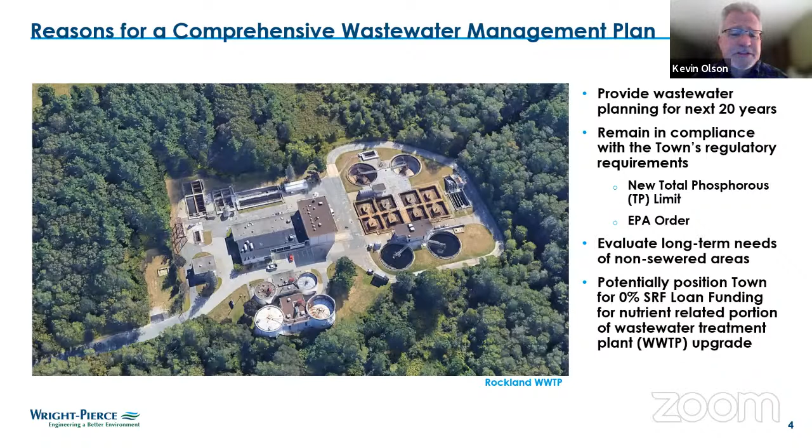Last bullet here, my last comment: completing a CWMP does potentially position the town of Rockland for 0% state revolving fund loans for the nutrient-related portion of any treatment plant upgrades. I just mentioned phosphorus; that certainly is the nutrient of focus. So there's a potential financial upside to completing the CWMP. With that, we'll hand it over to Adam.

All right, thanks, Kevin. As Kevin mentioned, I'm Adam Higgins. I'm the project engineer for the CWMP for Rockland. We finished phase one back around the same time the EPA order was being finalized, so back in late summer of 2022. We'll touch quickly on what went into that and how it relates to moving into phases 2 and 3. We recently completed phase 2 about a few weeks ago now, and we're currently working on phase 3.

So the CWMP, Comprehensive Wastewater Management Plan, we typically break up into three phases, where the first one is all about looking at the existing conditions for your wastewater system, the town as a whole, like population trends, metrics, town planning, zoning, etc. Existing conditions of your pipes in the ground for the sewer system, water demand in town, pump station existing conditions, and the wastewater treatment plant. Let's jump into that a little further.

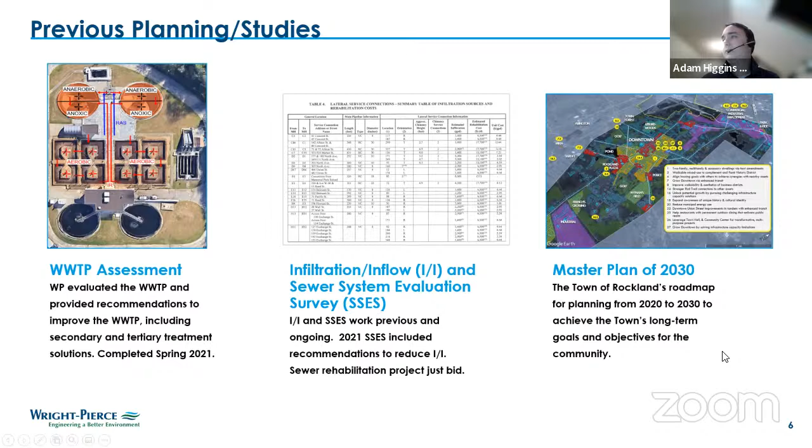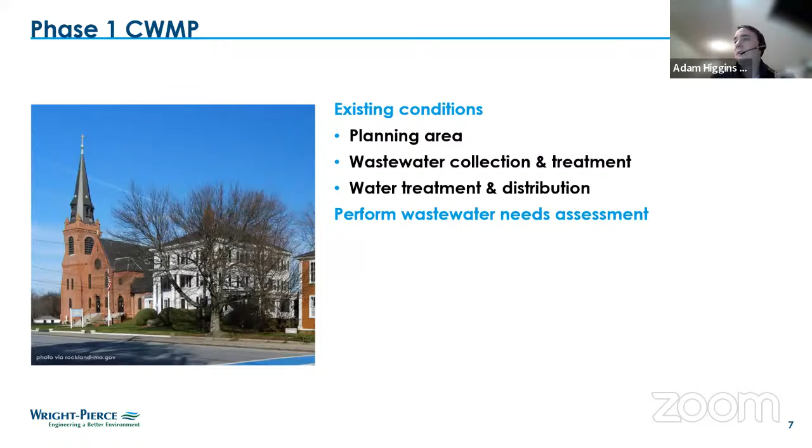And then we also take a look at Rockland as a whole. The town actually recently completed quite a few planning documents, the master plan, open space plan, and we did leverage those quite a bit for phase one. So again, phase one is all about establishing those existing conditions and identifying the potential problems in town, which will then move forward into phases 2 and 3. So we take a look at the entire town, collection system, treatment, water, and perform a wastewater needs assessment. Jump into that.

So as Kevin mentioned, Rockland is like 90 or 95% sewered, meaning most properties in town are served by the town sewer system. The remaining ones are serviced by a typical on-site subsurface wastewater disposal system, aka a septic system. And basically what phase one aims to do is take a look at those unsewered areas and see if septic systems really are the best option for the next 20 years in terms of providing adequate wastewater treatment.

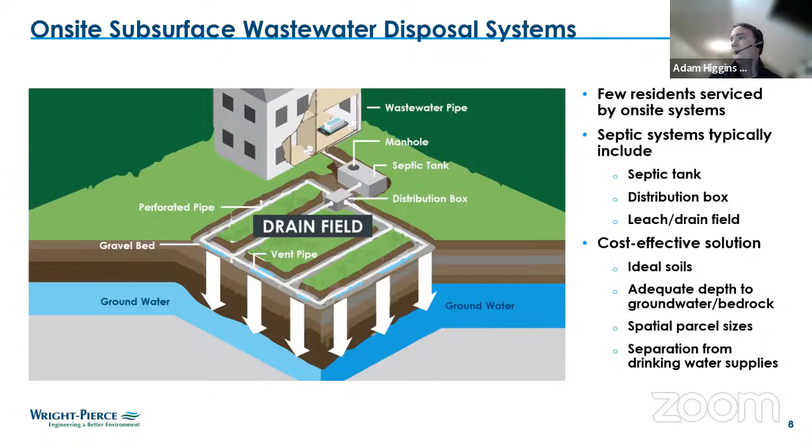So can someone confirm if you can see my cursor on the figure? Yes? Okay. Okay, great. That will help.

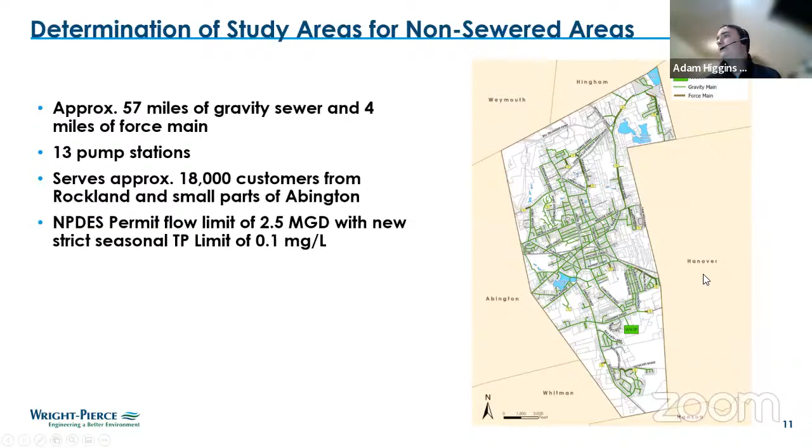As we mentioned before, the wastewater treatment plant was evaluated a couple of years ago, and we did leverage that report to establish the existing conditions. We updated it based on items that had changed since the report was finalized, and items that Veolia and the town have either updated or replaced, and also based on the data collected over the last 2 years. We updated what we call flows and loads, which I will get into.

But the main point I wanted to highlight here, because this is the largest looming upgrade project that the town and the sewer commission is going to face, that is basically going to be derived out of the CWMP, is the wastewater treatment plant upgrade. So, what is really driving this large upgrade?

And these specific types of equipment are called mechanical surface aerators. They're not the most flexible, but they were pretty popular back in the 70s and 80s. So we really wouldn't put these back in if we were upgrading a plant today. So just the type of equipment used at the plant is something that we would want to take a look at in any upgrade.

Adam, before you go, and just for background information to any of the residents on, the sewer plant went online, I believe, in 1962. That's when it was originally designed. It has had no major upgrades since that point. Right. Kevin, I would say 90% of that equipment is 1962. Yeah, I would agree. And so that's all of that concrete. And we did have structural engineers look at the concrete basin. So I'm sorry, Adam, keep going.

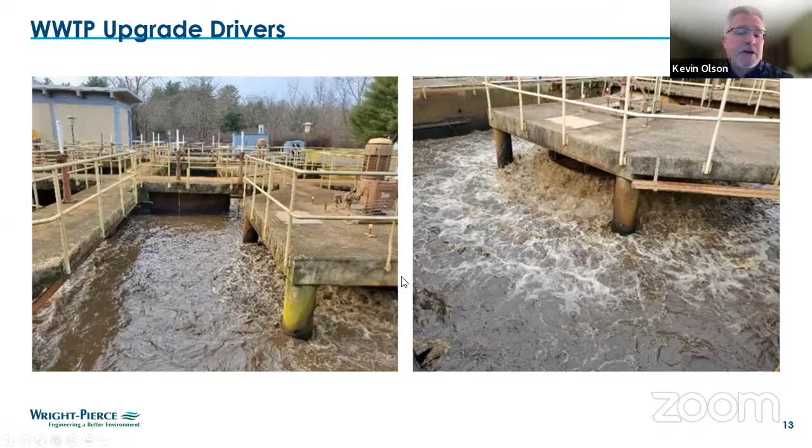Yeah, if you go down right there, that stem is still intact, but there's some stems that actually are completely rusted apart, so you cannot operate certain gates there. So just another real life example of the age. One other thing to mention on those gates and valves is that the valves themselves are corroded shut. You can't open them, and you can physically see the concrete lifting up and down like it was breathing. Yep.

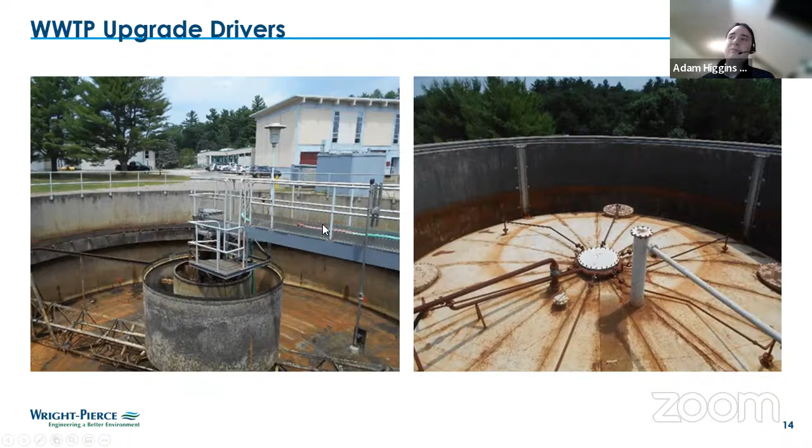So these are pictures of the anaerobic digesters, which are basically a gas pressure vessel. And you can see the corrosion and wear and tear that's evident on these structures, which is really just kind of how the entire plant is due to its age.

And this equipment here, we use to press the sludge solids and separate some of the water from it to dispose of the sludge solids at a landfill, for example. This type of equipment, again, was very popular 20, 30, 40 years ago. There are better options out there now.

This is a picture of the electrical generators for standby power. As we've heard, it's basically on its last legs, and Chuck has done a lot of work to try and get this replaced in the near term ahead of the upgrade based on that.

One more thing while Adam is on that: due to the age of the equipment, and I think Ray Pierce will verify this, one of the biggest obstacles we have is when a part is needed or something fails, we can't find those parts because they're no longer manufactured. Yep. Good point, Chuck. It's not uncommon to look on eBay, as funny as that sounds, for some of these parts. That's what we've been doing. Yep.

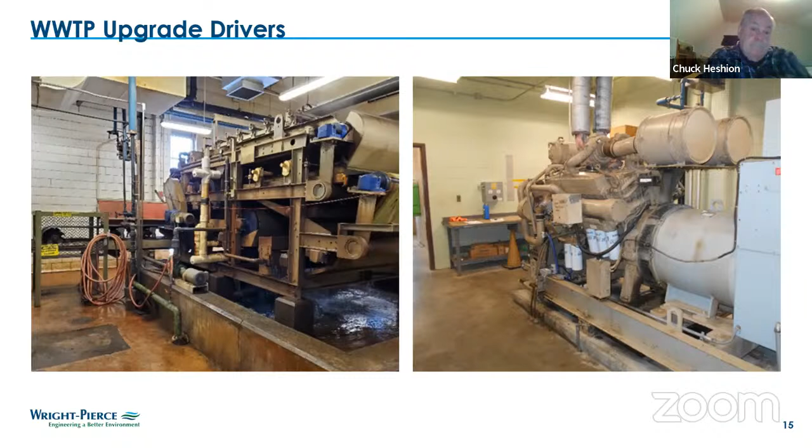So as I mentioned, the new NPDES permit that was issued contained a new total phosphorus limit. So you can see here an average monthly limit between April 1st and October 31st, which is considered the growing season. The limit is 0.1 milligrams per liter. And then in the non-growing season over the winter, the limit jumps up to 1 milligram per liter. But this value here, the 0.1, this is very strict, and to meet it reliably does require basically an equipment upgrade, a new process to be added, the tertiary treatment, to be able to meet that.

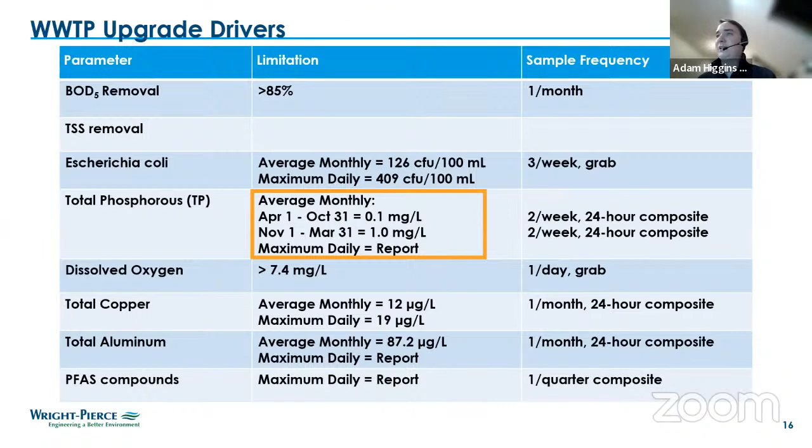So as we were wrapping up phase 1 in the summer, the EPA did issue an order in draft form in July, and then it was finalized in late August to early September. And part of the driver for that order is flows have been historically high at the wastewater treatment plant. They've been above permit. EPA really wants the town, the sewer commission, the plant to review infiltration and inflow reduction, peak flow reduction, basically ways to manage and reduce the flow coming to the wastewater treatment plant to get within permit.

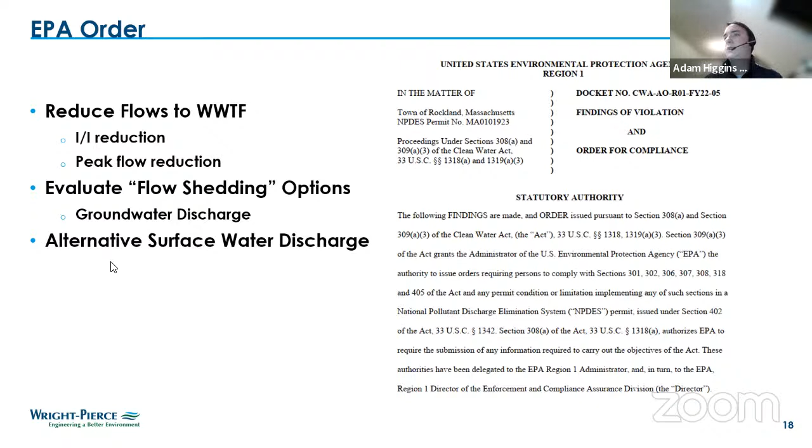And the EPA also wanted us to take a look at an alternative surface water discharge. So right now the treatment plant discharges to the French Stream, which is an impaired water. And we took a look, and really the only option that's nearby for Rockland would be to construct infrastructure, pipeline, pump stations to then get it to the Indian Head River in, I think Hanover is where we were looking at as an option. So not very close. Any questions on phase 1 before I jump into phase 2?

Okay. So if I could just throw in just as a reminder, when Adam said our permit limit is 2.5, we hit 7 today, 7 million gallons. Yeah, the chart Adam showed, we'd have to add several gradations going vertical on that, wouldn't we, just to show that? And I'm sure the average for January is going to be quite high based on the amount of rain we got. Yeah.

All right, so phase 2. So traditionally, phase 2 really only looks at those high needs areas that we developed in phase 1. So the 2 areas in the north on Weymouth Street and Pond Street. And we basically shortlist some options that may be better than septic systems. And we do a deeper dive and cut some of those options away. And the ones that are remaining, we move forward into phase 3. We also, based on the EPA order, added an evaluation of groundwater discharge potential locations, which we'll talk about further along, to potentially do some of that flow shedding that I talked about.

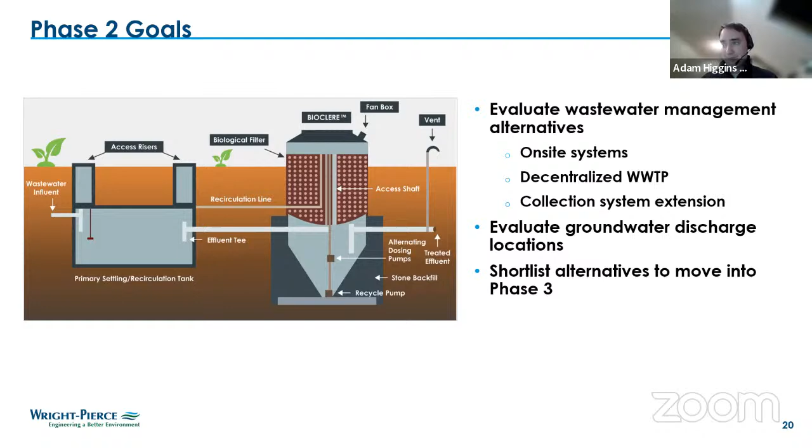So high needs area 1, Weymouth Street, shown here on the right. We have the parcels outlined in red. This green area is actually wetlands that are shown. It's in the northern part of town. The top 3 parcels that you see there are very wet, between surface water and wetlands. And it is near the existing collection system.

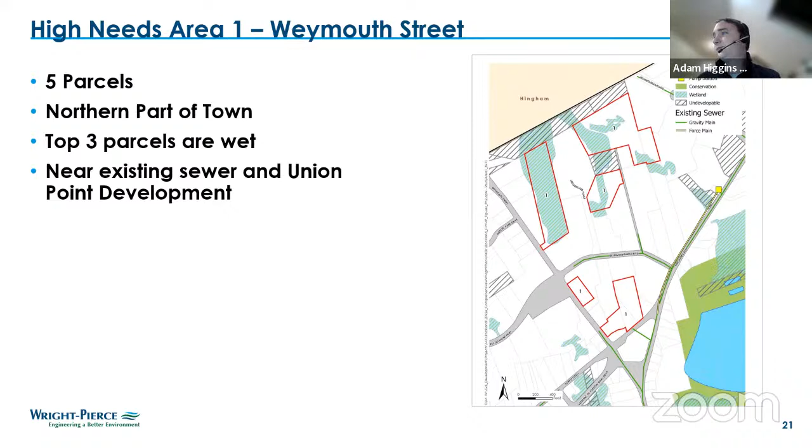You can see here in green. And it's near the Union Point development, which we'll get into a little further during the groundwater discussion on why that's important. Area 2, we have 2 parcels just to the right of where area 1 was, just above the reservoir. And as you can see, again, a lot of wetlands in this area, and also pretty close to the existing

sewer. If I may again interrupt Adam, I'm sorry, that area 2, Adam, could you highlight that? Where Adam is pointed to, that is the proposed shingle mill area. Right. Yeah, and it looks like the title of the slide, Adam, might be incorrect. Yeah, I saw that. So that's okay, though. It is area 2, just so you guys know. And you are within a drinking water protection zone 2 in this area.

So moving quickly along, we took a look and did a similar grading system to what we did in phase 1, where we had our grades based on different options like level of treatment. Does the treatment option address nutrient removal? How much would it cost? Is it hard to operate? Is it potentially hard to do legally or permitting? And we take all those grading values, add them up, and again, shortlist what we think should continue on into phase 3.

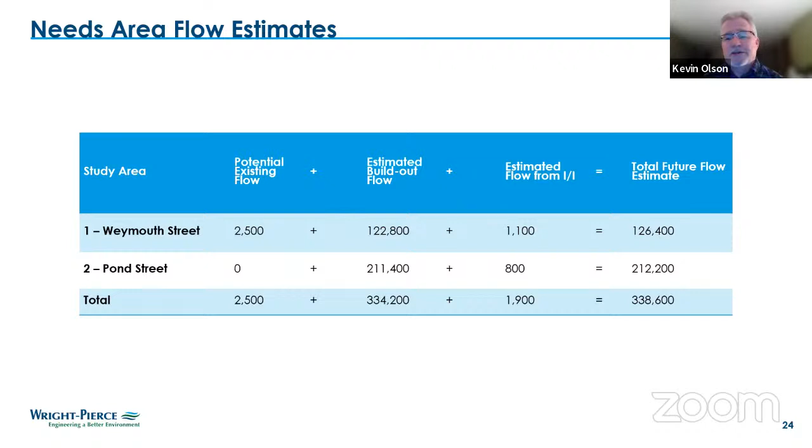Yeah, so Adam, if I could, the obvious takeaway on that previous slide is, given your current flow situation right now, if that happens, hopefully flow shedding or reduction in I/I will make room and allow the sewer moratorium to be lifted and allow some of these things to happen. But you can't just obviously pile those flows onto the current situation. So, right. Sorry, Adam, just wanted to add that. Nope, that was good. Thank you.

All right. So the next part of phase 2 is really evaluating, based on the EPA order, where could groundwater discharge or wastewater disposal into the ground occur within Rockland. What that means, you have your existing plant down here, which discharges into a surface water body or the French stream.

If, similar to your septic system, which just discharges out to your yard and then goes down to groundwater, that is an option for a wastewater treatment plant. And you need significantly more land based on the amount of flow, but the EPA basically said, as an option, take a look at if this is possible to help reduce flows to your wastewater treatment plant, since you have had historical flow issues.

So what we usually will do when we take a look at potential sites for groundwater discharge disposal, we like large vacant land, as these do take up quite a bit of space. We don't want them to be wet. So wetlands, surface water bodies, usually like to avoid those. It's more difficult to treat the wastewater to a level inside a drinking water protection zone. So we like to avoid those, but if we can't, we just understand that it's going to be a bit more expensive to treat that wastewater. We want to avoid high groundwater areas, areas with regulated setbacks, etc.

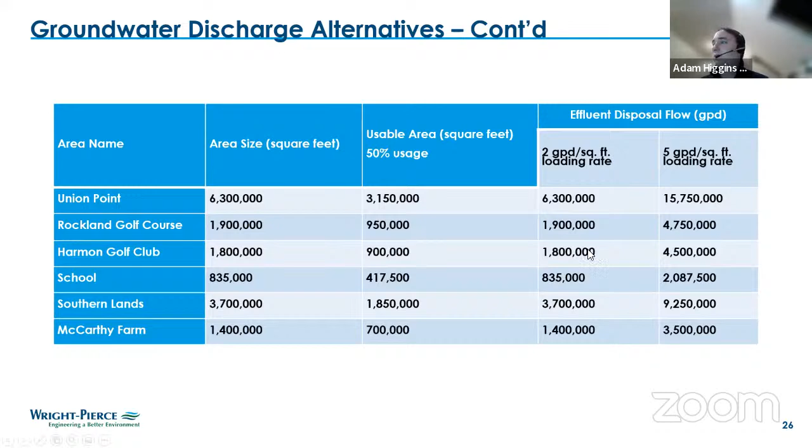Adam, I don't know if now is a good time to maybe just give a brief update of, earlier this week, we got a good working group together to really start to vet out the potential alternative sites, and we learned quite a bit. I don't know if you want to just touch on that quick. Yeah. So please do, Adam, on that, because that was quite productive.

It was. Yeah. So Chuck was great and got a bunch of us together earlier this week on Tuesday. So the town administrator, Doug, representatives from each golf course, a representative from the planning board and Union Point sat down with Chuck, myself, and Kevin, and we discussed each of these areas and do they make sense? Did we miss anything? Are there other potential options that we didn't evaluate? Like the Jefferson School, for example, was brought up.

McCarthy's farm was not necessarily eliminated, but talked about as a potential non-starter. The Beach Hill landfill was talked about in terms of adding it in as an option. And we discussed quite in depth the plan and development for Union Point and why this area that we're showing may not necessarily be an option.

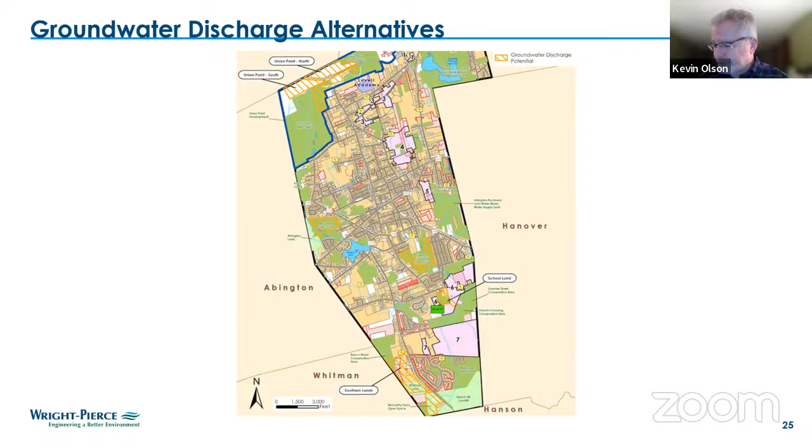Any questions on phase 2 before I jump to phase 3? Okay. So as we mentioned, we are starting phase 3 this month. Have already done quite a bit of legwork. And really this takes a look at every piece that we evaluated in phase 1 and provides the recommendations, cost estimates, schedule for improvements for each of those parts and pieces.

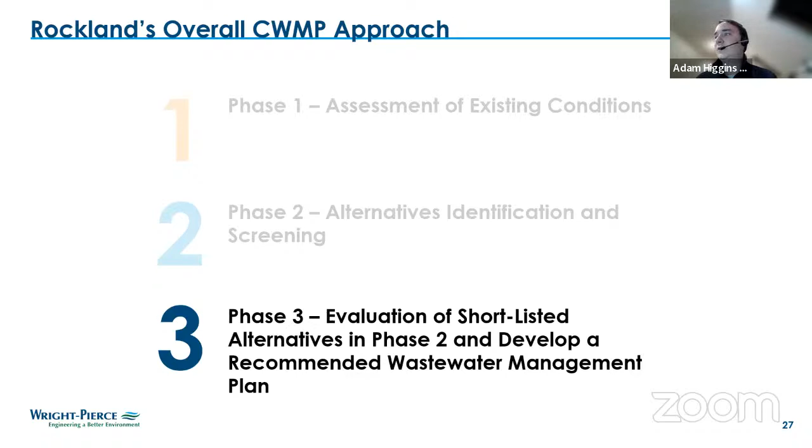So we take a look at those unsewered needs areas, so 1 and 2. We provide the cost estimates for staying with on-site septic systems, potentially going with an innovative alternative system, the options for adding in a collection system and decentralized wastewater treatment plant, or connecting to the existing collection system.

And based on those flows that we estimated for each of those, we trace that flow through the existing collection system and basically say, do the pipes, do the pump stations have enough capacity for this flow? If not, you're going to have to plan to upsize them if you want to add these areas in.

I could add one more thing. For the people that are viewing this, these are some of the things that are going to be supplied in estimating our rates for the future. So that's why this, along with the rate study, is so important to you, the taxpayer, to question these and understand why our rates are going to be doing what they are and the necessity of that.

But all right, so next we look at the existing collection system and basically identify further studies and work that can be conducted to reduce I/I within the existing collection system. One of the EPA order items was to review flow equalization options. So this looked at both inline and offline storage.

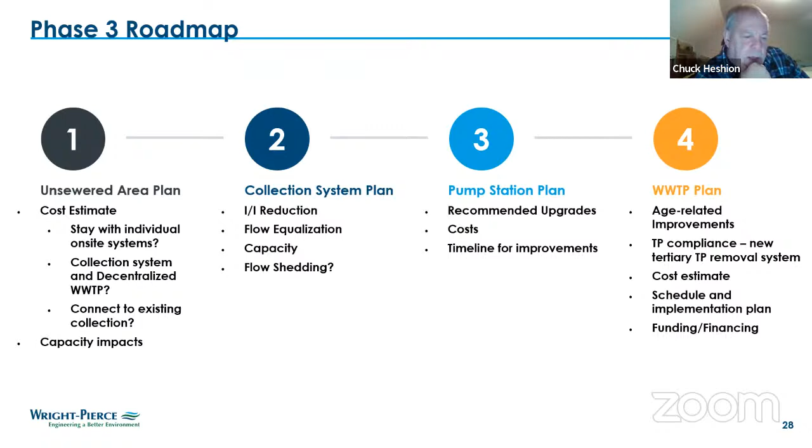I have a question. Who from Union Point was there at your meeting? Okay, I will answer that. Tom Henderson was there. And again, the way we formatted this was basically just as we did tonight. We focused strictly on phase 2 in those 7 areas, went right around the room and asked, what do you see as the constraints, pros or cons? What Tom did mention is the concern for PFAS in that area, and the fact that the development is still in its development stage with the new owners, Brookfield. So anything being done with the base, he indicated, and Kevin, jump in if I'm wrong, that it's a long way off from any kind of decisions.

Did he happen to tell you that you can't do it there because any sewerage goes to whatever is built there, and that's in the legislation? There's legislation governing the base and governing water and sewer. I was on the state committee for this, for the MEPA process, for 6 years. Adam, I don't believe he did mention that. Because he knows nothing about it. Okay, what we could do is I could send an email to Tom to see if he could forward any of that information to you, Kevin. Yeah, that would be helpful, and really good to know.